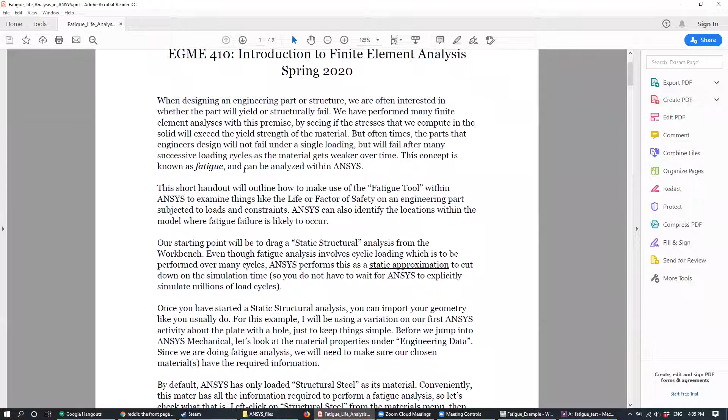So a lot of you guys are familiar with it. And the nice thing is that Ansys actually has a way to model fatigue and give you some answers for fatigue. It'll tell you things like how many loading cycles this part can withstand before it ultimately breaks, and it can also tell you a factor of safety.

And so the tool that we're going to use in Ansys to do this is called the fatigue tool. So it's very aptly named, right? And it's nice because it's just an extension off of a static structural simulation. So if you have a project already for your final project, say you've already done a static structural, you can just add the fatigue tool to it, and there's really nothing else you have to change. This kind of just goes on top of everything else.

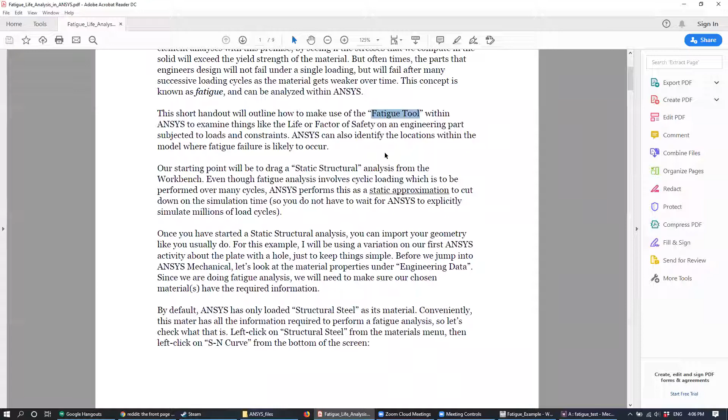The only caveat is that you have to have a material that supports this fatigue analysis. So in particular, for your material, you need to have what's called the SN curve defined. That's the stress versus the number of loading cycles - that's what SN means. So if you're using some of the default materials in Ansys, like structural steel, and I've tested it for aluminum alloy, the one that's already built in, that has it already. But if you're using a material that's outside of Ansys, you need to do quite a bit of data entry in order to get it to work.

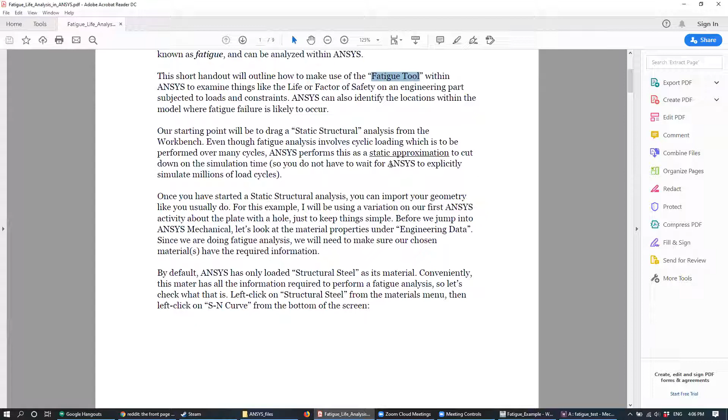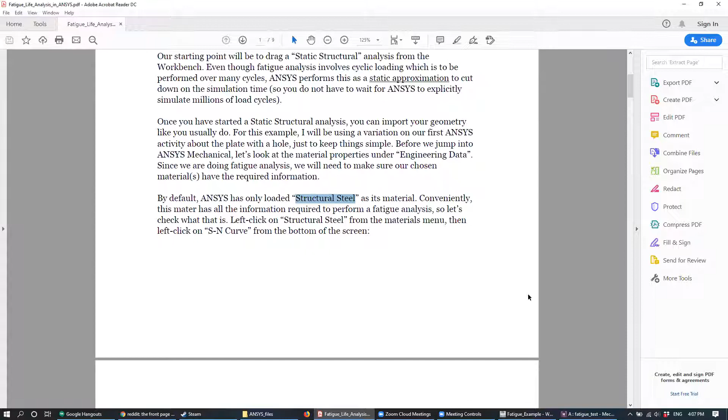So in this, basically, there's just a short handout and demonstration. I'm going to be using structural steel just because it has all of the properties laid out. But I'll show you kind of where you can check that. Any questions on this before we jump into Ansys?

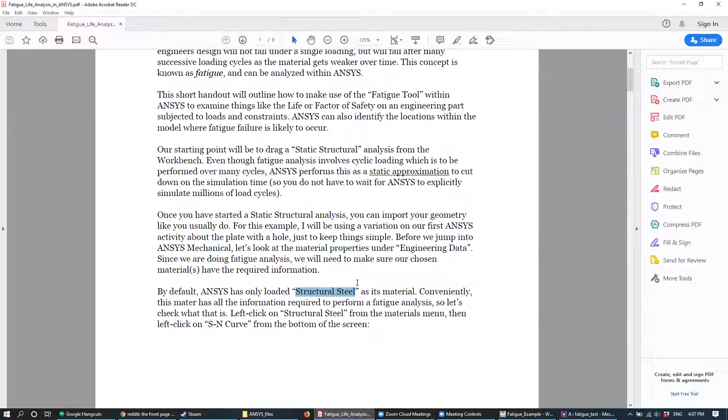So here we are in Ansys. This is an example project that I've made. I can probably upload this too, because what I did basically was I just took kind of a thick version of our first Ansys activity for a plate with a hole, and I'm doing a fatigue analysis on it. So our first stop is actually going to be engineering data.

So let's go ahead and double click that. Remember, this is where we define all of our material properties. So you can see for this project, I have two materials right now - structural steel, which is the default material in Ansys. You can see a lot of this information is already kind of filled out for you, things like the Young's modulus, the Poisson's ratio, and then that fills in your bulk modulus and your shear modulus, respectively.

But for the fatigue analysis, I want to draw your attention to a new entry here that we haven't seen before, and that's called the SN curve. So if you're working with an Ansys standard material like structural steel or aluminum alloy, some of them come with this. You can just left click this, and you can see the information here on the right. Let me move this a little bit so you can see. So like we mentioned, the SN curve stands for the stress and the number of cycles.

Basically what this curve is defining is the decrease or decay of the yield strength of material as you load it for a certain amount of cycles. In this case, the x-axis is the number of cycles, and the y-axis is the stress. It's defined as alternating stress because that's the stress when you load it and then unload it - it's a cyclic kind of stress. You can see that it's defined by this. So this is already done for you, so you don't have to add that.

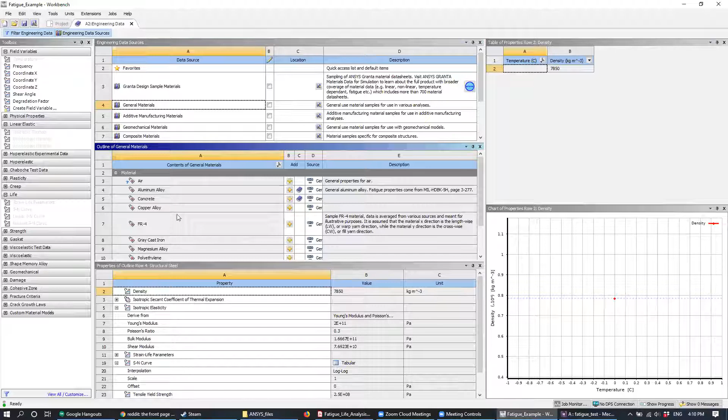But let's check concrete and see if that's there. I've added concrete to our project by clicking this plus button. So now we can go back here, and you can see for concrete, if you look at the bottom, there's no SN curve.

Not all the materials in Ansys are going to have that SN curve for you. So for those that don't, you need to add it yourself. If you don't see the SN curve right here, what you need to do is go

to the left-hand side of the toolbox here, and you can see right here we have an SN curve, under the life parameters. Let's go ahead and double-click that, and you can see you've added the SN curve property to this concrete.

But when you left-click it, you can see on the right-hand side all the data here is empty, because it wasn't previously defined. So what you need to do, if you want to perform a fatigue analysis with concrete, is look up online and see what SN curve you can use for concrete.

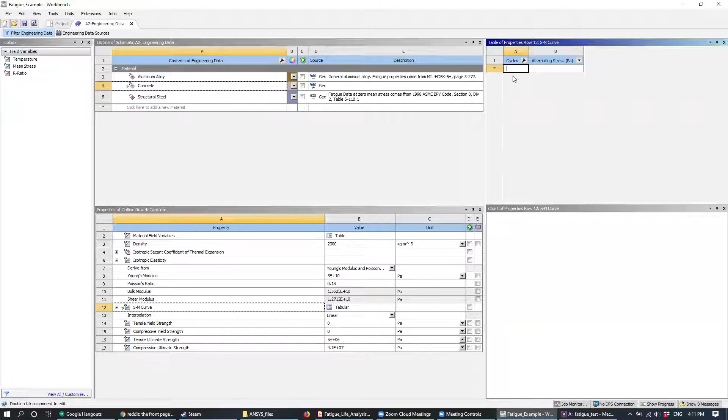I don't have this off the top of my head, but I can show you how to enter things into this table. It works basically just like Microsoft Excel, so you would type in a number, and then you would type in the stress.

So let's say this is 1e to the 10, and then you would keep adding more here. I'm just adding in random numbers right now. But if you can find this SN data online, you can basically input it manually

so you can perform a fatigue analysis on this material. I'm not sure if you import a material from SolidWorks, they might have this data already for you, so that might be something to check for your project. If you've already CAD'd it up in SolidWorks, importing the material might have this information for you.

But I've never tried that before. You'd kind of hope that SolidWorks might have this because it makes things really convenient, because finding this information online is pretty difficult.

For this activity, I tried to look up some of these SN curves, but I wasn't that successful. I found a lot of plots, but plots aren't really that useful because you can't really read the numbers off them. So getting the actual data might prove to be a bit more challenging.

Alright, are there any questions on this? Let me delete this comment.

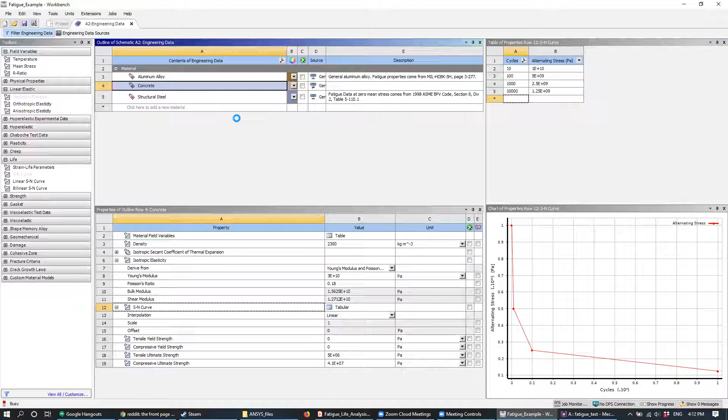Question? Do you have a question, Sergio? Is that...

No, this is just an informational handout. The activity was totally done from the last lecture, so this is just for your information on how to do fatigue analysis. It's nothing to turn in, but just something if you're interested in doing it in Ansys. This is just something I put together to show you where the buttons are basically.

Any more questions on this? Okay.

So then let's exit out of here since we have the materials that we want. I've already prepared the geometry just for the sake of brevity. Let's double click model, and let's open this up in mechanical, which I already did.

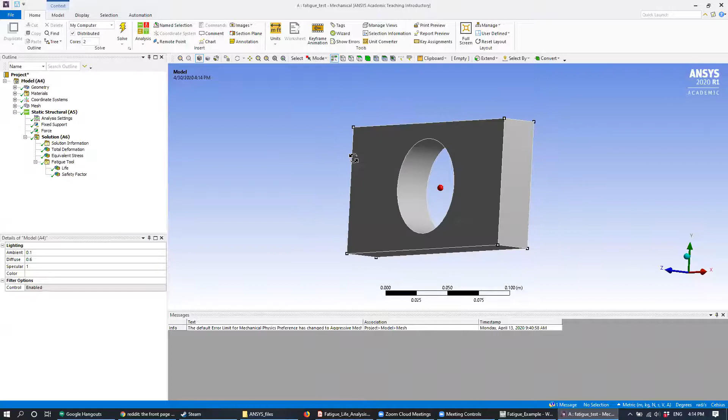I watch a lot of cooking shows on YouTube just because I enjoy cooking. I feel like one of those people on the YouTube cooking shows where they show you how to prepare something - they tell you to marinate it for an hour, but then they have one that's already magically prepared for you. So that's what this kind of is right now.

Okay, so here we are in static structural. We've seen this probably a bajillion times this semester, so a lot of this we don't have to do. But you can see here I've already meshed the material.

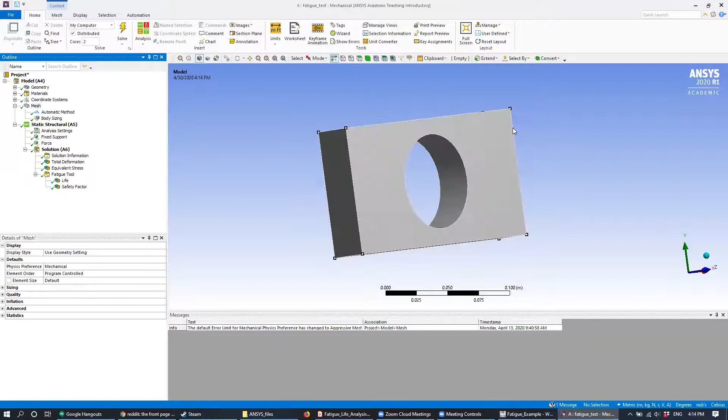The question is, is this project on titanium? I don't think I've uploaded it yet, but I will right after this. Yeah, I'll upload the whole project just so you can see basically the kind of thing from start to finish.

So our first step in Ansys Mechanical is always the mesh. I've already prepared the mesh for you, so that's good.

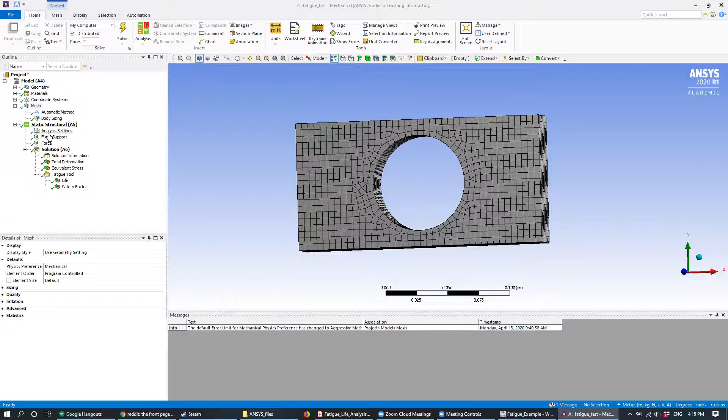Next, we have to apply a boundary condition. Just like we did in Ansys Activity 1, I've applied a fixed support on the left-hand side, and then I've supplied a tensile force on the right. So we have a bar with a hole, and somehow we've fixed it, glued it to a wall, and then we're pulling it on the other side.

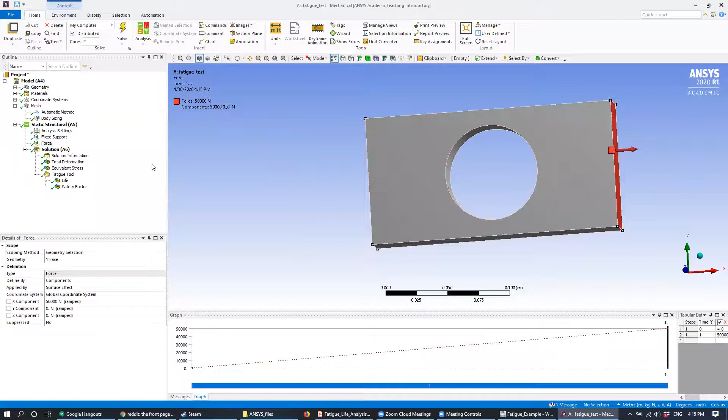And then for the outputs, I've defined the total deformation and the stress. So all that is pretty standard, we've done that a lot before.

So the thing that we need that's new is going to be this fatigue tool. Let me delete this just so you guys can see it being made from scratch.

To open up the fatigue tool, remember you don't have to change anything in your static structural. You basically just define everything as you normally do, we're just going to add to this. So let's right-click on Solution A6, then go to Insert, and from Insert, go down to this button known as Fatigue. We'll click that, and you can see we've defined our fatigue tool.

And you can see once we've included this fatigue tool, we have this new menu down here on the left. You can see our 3D window changed over here too. So there's a few settings that we have to change here.

So the first type is the type of the loading. We have several options here. The first option you see is fully reversed. What that means is that it's going to take all the loads in your model and fully reverse them. So you can see you have a sinusoid wave here.

So it's going to start up at 1 right here. When the load is 1, it's going to apply the loads basically exactly as it is in the model. But as it goes down, you can see we're in the trough of the sine wave. Down here, what it's going to do is reverse all of the loads. So in this case, since we have a tensile force, when that load is reversed, it's going to go back into a compressive force. So it's going to basically repeat this cycle of tensile, compressive, with the exact same magnitude, or at least it's assumed to be. And each cycle of tensile and then compressive constitutes one loading cycle.

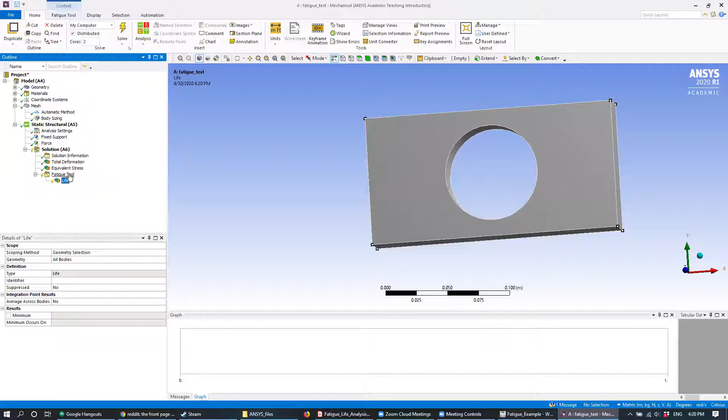And then from here, we can choose some additional outputs. Let's choose life. So the life output is going to show you a color contour, and from that color contour, you can see how many cycles certain areas of the part can undergo before it fails. And then let's also include safety factor, which is pretty self-explanatory.

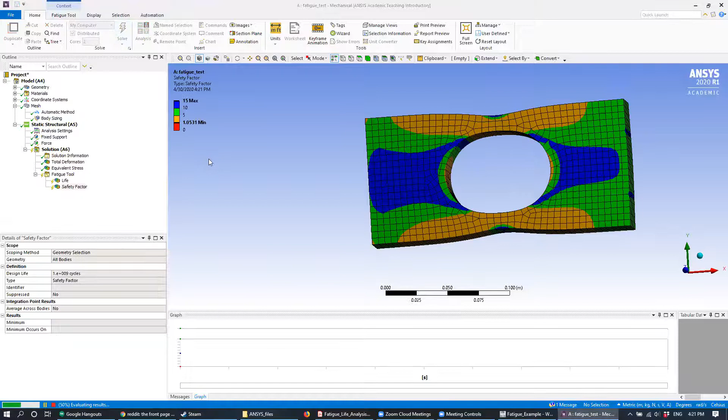Once we've set all that stuff, we can go ahead and hit solve. Actually, let me lower this load — I think in the document I only had this at 10,000. So go ahead and click solve, and while you wait for it to solve, are there any questions I can answer?

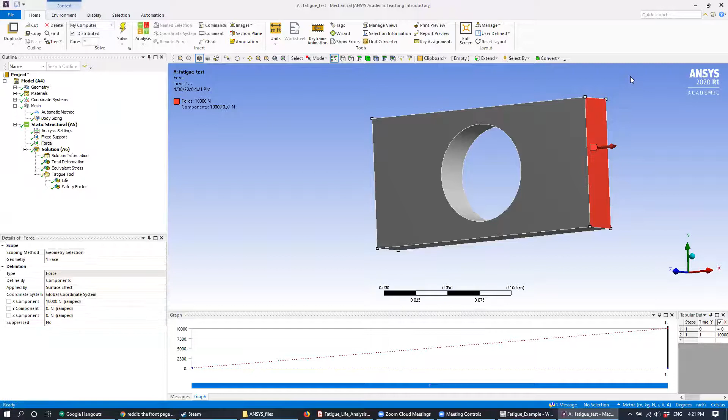All right, looks like it's done. So normally the life one will show you something interesting, but it's not. Let me change this down to 1,000. Let's see. So ideally, what the life graph should show you is how many loading cycles your part can withstand before it breaks. Maybe I need to make this higher.

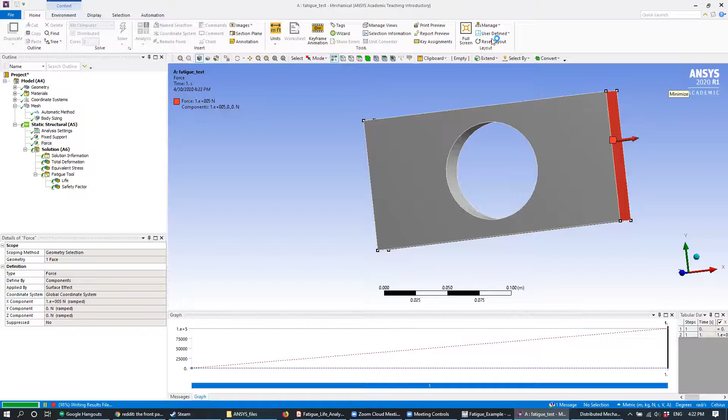There we go. So if you increase the force — I've increased the force to 100,000 — let's look at this life graph. So you can see the color scheme that Ansys uses: it uses blue for areas that are relatively safe that you don't have to worry about, and red to indicate places where you should look at this.

So for the life graph, the way you read this is that the blue areas tell you regions of the model that can withstand a lot of cycles before breaking. And red areas are in danger of fatigue failure before it reaches up to that maximum of 1e6.

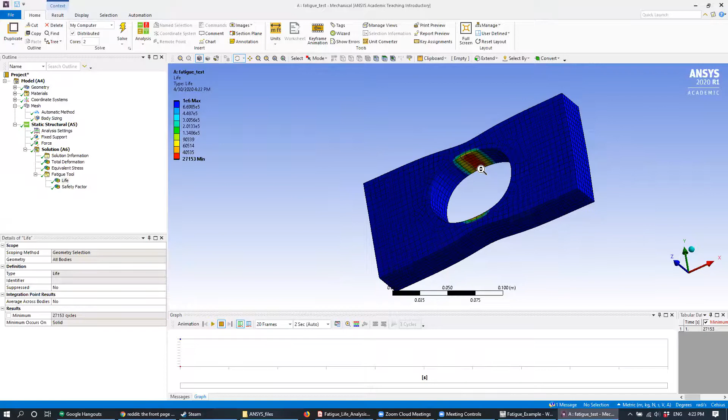So you can see here we have red areas on the inside here. And what Ansys is telling us is that with the loading as we had here, it can only withstand 27,153 cycles before it's in danger of fatigue failure, and it's going to fail first on these areas right here.

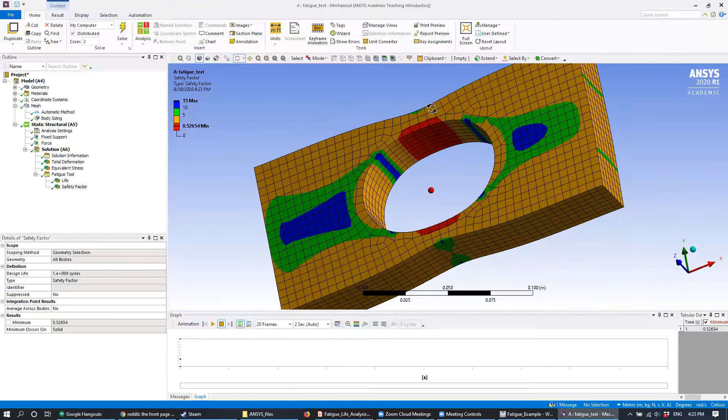So now you can look at safety factor. Basically, the way this is defined is that it defines areas of the model which are in danger of failing. So you can see here we have a safety factor of only 0.526, which means these areas are going to fail before they reach their maximum life.

Yeah, so the comment is that topology optimization would be useful for this. So the question is, does the fatigue tool automatically generate the safety factor? Yes, it does. I think it has some kind of threshold for the minimum amount of cycles it wants to have, and then it divides it by that — so this is kind of a safety factor based on how many cycles it can withstand.

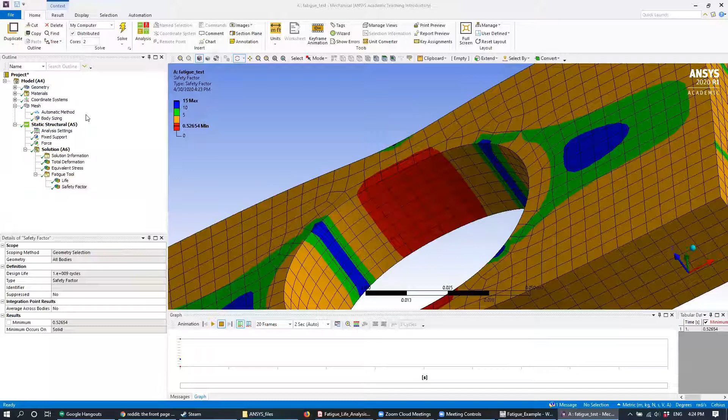Right, so we can change this — that was a zero-based loading. Let's change this to fully reversed and evaluate the results again. So you can see if we change the results to fully reversed, we can only withstand 8,537 cycles. So if you fully reverse your load, it can withstand a lot less stress.

All right, so I'm getting an error that it's missing the yield strength. Oh, okay, so you're getting an error where you can't find the yield strength — yeah, that's going to be an engineering material issue. So before I go back to the engineering data, are there any questions on this?

Yeah, so the idea is that the red locations are where it's going to fatigue first.

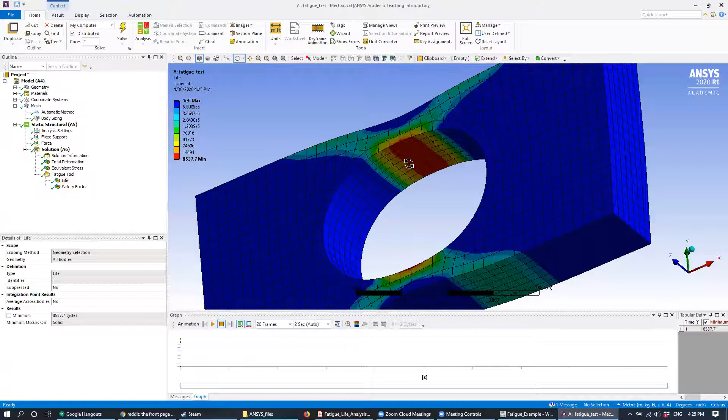Yep, all right. So let's go back to engineering data. Let's close this.

Okay, so are you using this? Sam, are you doing this for one of the materials in your project? So not structural steel and not aluminum alloy, I'm guessing, right?

Okay, so I think you have to add them here. Let's see, it's one of these here. Oh, nice.

I think what you have to do is look on the left here, you see this strength right here. And then what you can do is double click this strength parameter. You might need, I don't know if you need all four of these, but you can basically double click these to add them to your material, and then you can input the data for those as you find it.

So if you're missing data for a certain material, then adding a property is kind of in two steps. You have to add the field for the property here from the left first, and then you come to the middle here, and then you actually add the data for that. Yeah, so it's under strength right here.

All right. Any more questions on this?

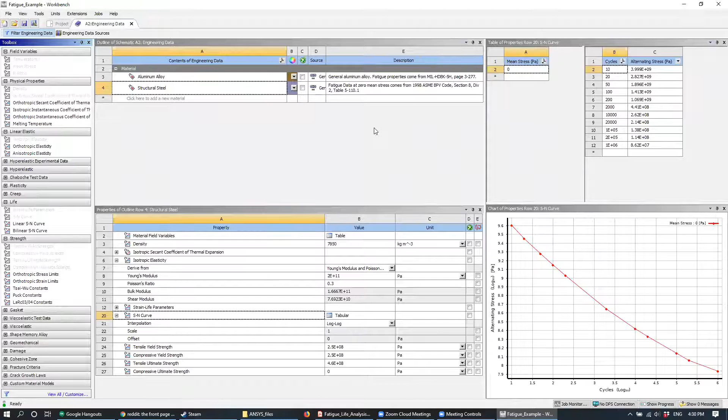Professor, I have a question. Sure, yes. So when it came to, I remember you brought it up at one point. I'm not using my computer for Zoom, I just have it separate.

But last week when you were bringing up the materials that can be used for the final project, you brought up wood, and then we had to do something specifically different if our part was a wooden body. Can you repeat what that was? Because my project is basically wood for the majority of the part, and when I go into my simulation, I'm trying to see the best way I can change the material to get the exact properties of the type of wood that I'm using.